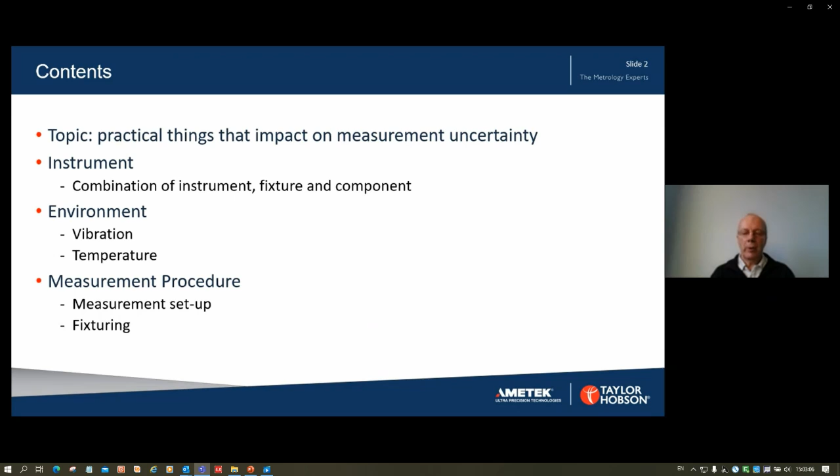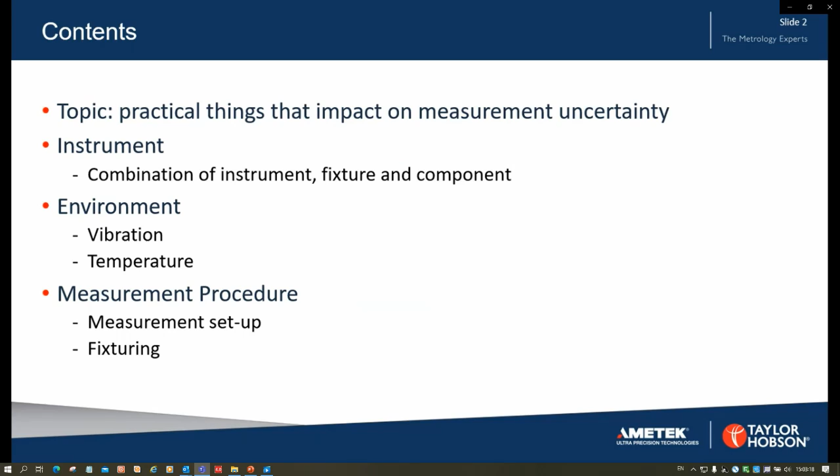I'll avoid instrument specifications as much as possible. Instead, we'll be looking at those practical things that affect the measurement but are not directly related to the instrument performance.

Before moving into the main body of the presentation, I thought it would be helpful to look at two preliminary slides to get us to a point of common understanding. The first slide will outline some of the influences that affect the measurement. The second slide will highlight the scale of the quantity values that we might be measuring with these instruments.

However, as I've implied, there are other influences on the measurement quality. These influences are the responsibility of the end user, or user for short. In the first instance, the end user is responsible for specifying the exact configuration of the instrument. Again, economy will play a part in the decisions made.

As an example, instruments are commonly available with different gauge resolutions. They might also be available with different anti-vibration solutions such as solid rubber mounts, pneumatic mounts, or even active anti-vibration mounts. These different configurations will each have their own characteristics.

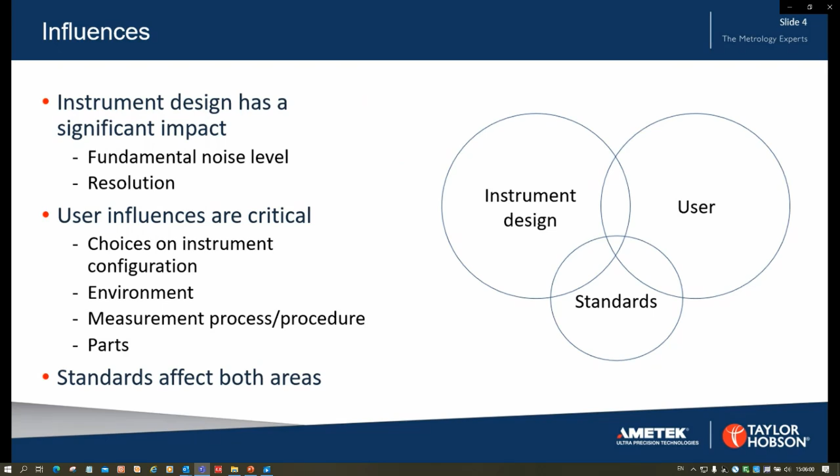The second preliminary topic is measurement scale. This is included to help us come to a common understanding of the units of measurement that we're using by relating them back to things that we might all have encountered in some way.

In the field of surface metrology, we deal with a significant range of dimensions, from less than a millimetre to 1,000 millimetres or more. However, most of the characteristics that we deal with are specified in the default unit of micrometers, or 1,000th of a millimetre.

We happily subdivide the micrometer. For example, we might talk about form deviations that are of the order of 1/10 of a micrometer.

With surface texture, we often talk about values that have a smaller scale than this. For example, it's not uncommon for surface roughness Ra values to be in the order of 0.01 micrometer.

We're all familiar with the 1 millimeter scale marks on a steel rule or tape measure. Going smaller than that, the thickness of a typical sheet of printer paper is about 100 micrometers.

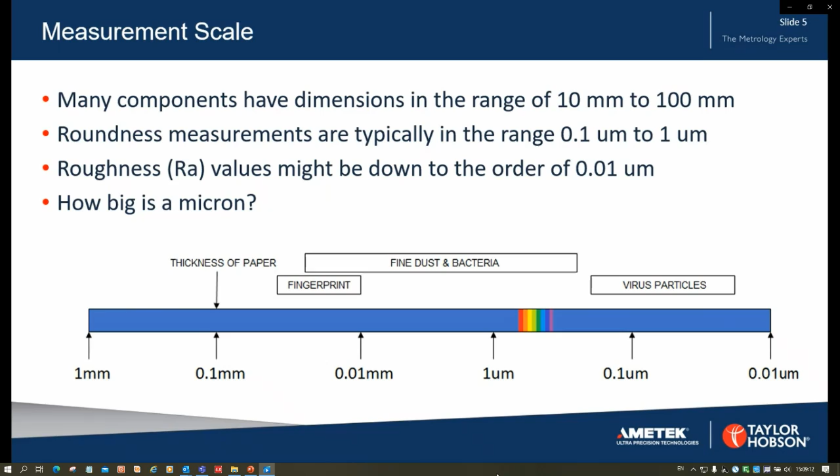In this next section, we'll look at some of the aspects of the instrument that contribute to the measurement uncertainty. For the purposes of this discussion, systematic errors such as axis straightness are not considered.

Each of the axes directly involved in the measurement will usually have some method of moving the axis, or some form of drive mechanism. The drive mechanism is likely to contain a motor and drivetrain, both of which can add noise into the measurement. The gauge will have a given resolution or resolutions, and of course the electronics might also be considered as a noise source.

Each of these systems contribute to the internal noise level of the instrument, which will typically be specified at particular measurement conditions, such as gauge resolution and axis speed.

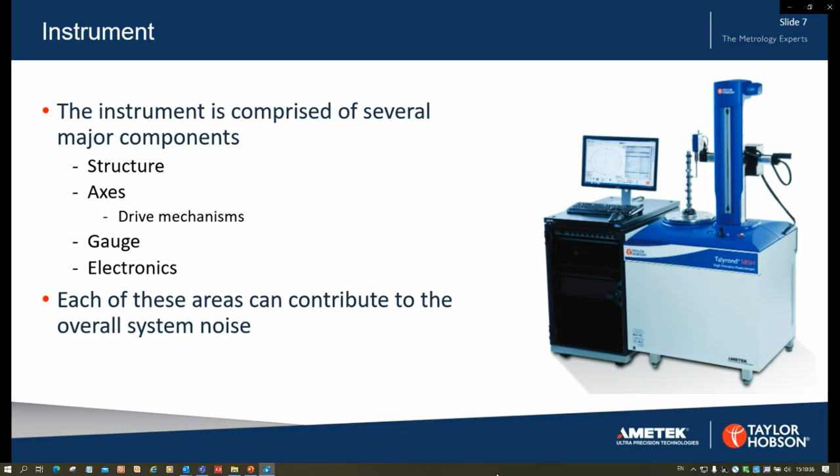At the same time, the stylus tip and stylus force might be dictated by standards. For example, in surface texture measurements, these two parameters are dictated by ISO 3274.

Design choices will affect the materials used in the stylus and its overall geometry. One good example is the interface between the stylus and the gauge. Regardless of the geometry of the measuring part of the stylus, this interface will have been decided by the instrument manufacturer to allow for interchangeable styli.

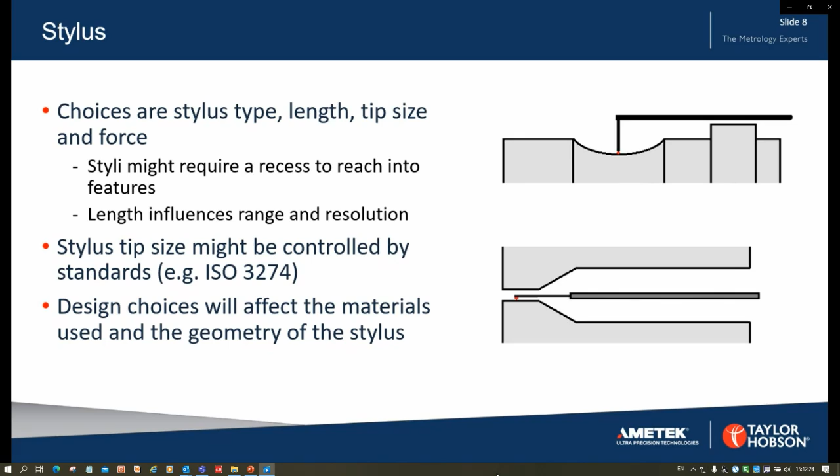Whilst the static force might be dictated by standards, the dynamic measurement force is a function of the traverse speed and surface acceleration, as well as the static force. Subject to the speed selections of the instrument, the choice of measurement speed is a user selection. The surface accelerations are dictated by a combination of the traverse speed and the form of the component. This again is a user influence.

We often talk about the concept of tracking, the ability of the stylus tip to follow the surface of the component. Another way of looking at this is to consider stylus flight. This is the same concept, but stated in a different way. Stylus flight is where the stylus tip leaves the surface of the component because the forces on the stylus are insufficient to keep the stylus in contact.

This might occur where the stylus tip has been forced rapidly up a feature on the surface, such as a machining mark.

Once the stylus is in flight, the main force on the stylus is the static stylus force, which will accelerate the tip towards the surface again. The time to reach the surface, and consequently the distance to the next measurable point on the surface, is governed by the trajectory of the tip. Moreover, the tip might well continue to rise off the surface for a brief time after leaving the surface.

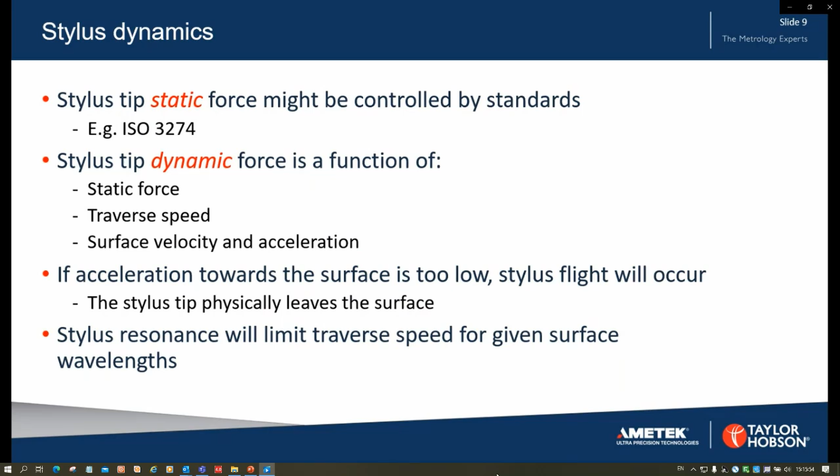The first wave after leaving the surface is likely to be highly irregular, as this is largely governed by the stylus trajectory at the time the tip leaves the surface. Stylus flight can be mitigated to a large extent by reducing measurement speed.

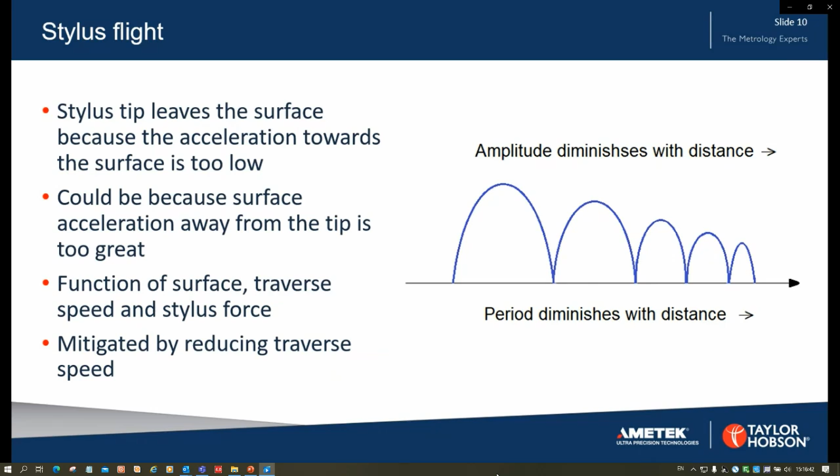As mentioned previously, stylus resonance is mainly excited by vibration. This is any vibration reaching the stylus or gauge. Stylus resonance manifests itself as an almost constant frequency, which is dependent principally on the stylus design. The amplitude will be dependent on the driving force or vibration level.

The wavelength due to stylus resonance is very short and is typically shorter than common LS filter values. The effect of resonance on the profile may therefore be reduced by the LS filter.

Resonance can also be caused by regular surface imperfections, which, when measured at a constant speed, equate to a frequency that is close to the natural frequency of the stylus, or a simple subharmonic. In this situation, it might be necessary to reduce the measurement speed.

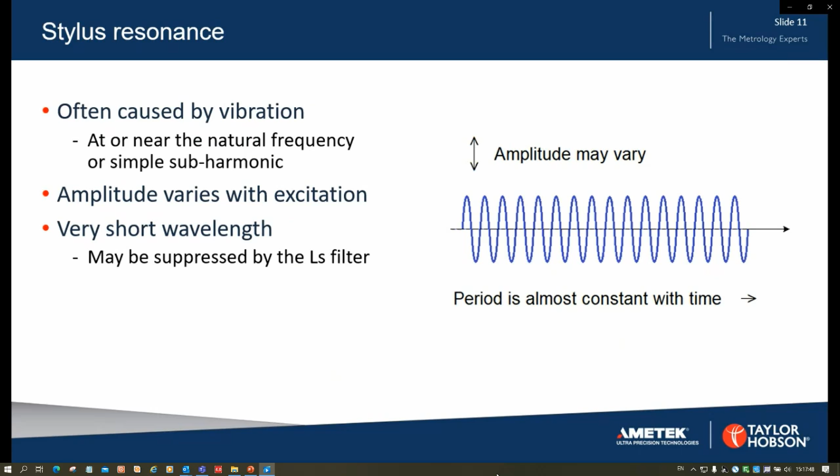The discussion on stylus resonance brings us to the next section in this presentation, which is environmental effects. There are two main environmental effects that affect the performance of the instrument: temperature and vibration.

Temperature changes during a measurement can cause drift, primarily due to differential expansion. Many of the measurements that we might take might be completed quickly. In such circumstances, the effects of temperature changes within the measurement room might have little effect because of the short timescale. However, some of the measurements that we take might involve a much longer timescale.

For example, when measuring on a roundness instrument, it is quite common to take several measurements to establish an axis and then take further measurements using this axis as a datum. Temperature changes during this process can cause drift, affecting the axis definition that we have taken. Where this is an issue, the magnitude of the drift would have to be quantified and taken into account into the uncertainty budget.

Instrument siting is important. For example, if the instrument is close to a window, direct heating from sunlight might cause significant differential heating of the instrument, which in turn will affect the measurements. The same is true for radiators and other heat sources.

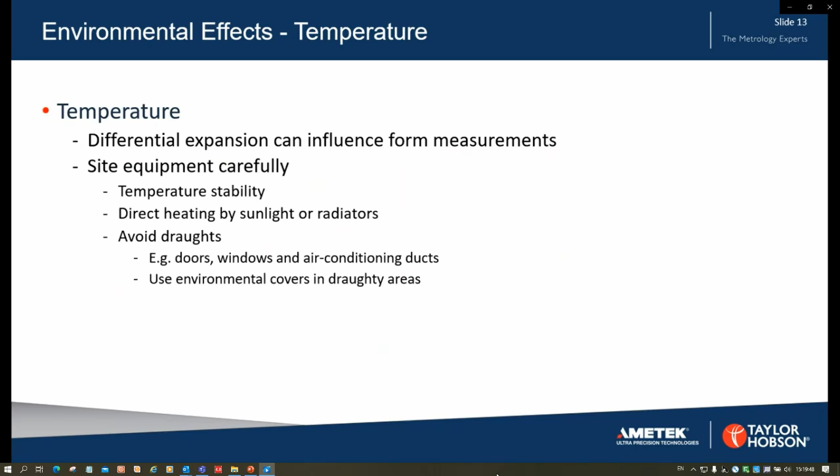The second major issue is vibration. The two sources of vibration are airborne and floorborne. With airborne vibration, the effects are likely to influence different parts of the instrument, whereas with floorborne vibration, the effects are likely to impact the whole instrument structure.

We've already mentioned drafts. Aside from differential cooling or heating, drafts can give rise to a source of airborne vibration. Drafts can easily affect the stylus and can also cause vibration in panels and other parts of the instrument. The use of an environmental cabinet can help reduce some of these effects.

Another source of airborne vibration is sound, especially sharp or percussive sounds, such as might result from something being dropped or a door slamming nearby. Talking close to the instrument can also cause vibrations in the stylus, as the resonant frequency of the stylus is likely to be within the frequency range of a human voice.

Perhaps the most significant source of vibration to be considered is floorborne vibration. Any vibration in the floor on which the instrument is mounted will be transmitted into the structure of the instrument. This will result in differential vibration within the system, which will in turn affect the measurements.

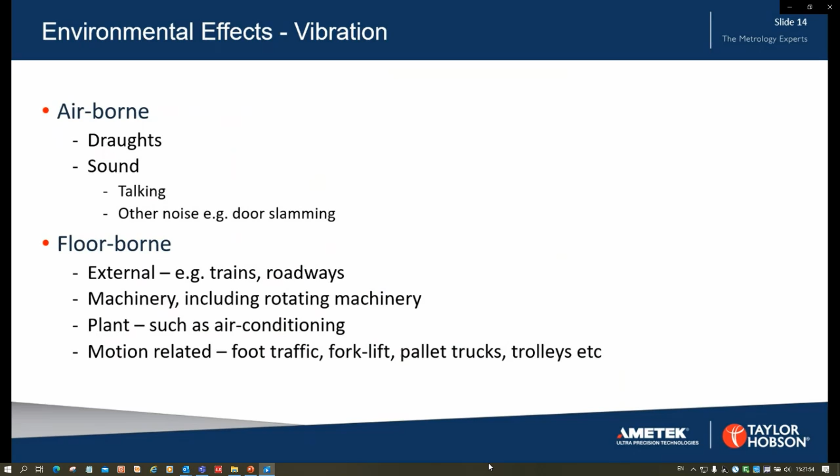The impact of floorborne vibration is strongly linked to magnification. If you have ever used a camera with different focal length lenses or a zoom lens, you will know that camera shake becomes more significant as the focal length and therefore the magnification increases. To mitigate the camera shake, improved support such as a tripod might be required, and the exposure time could be decreased.

Not surprisingly, recommendations for laboratory floor vibration limits are linked to magnification. Originally, the recommendations might well have been linked to the use of standard laboratory instruments, such as an optical microscope. For any given vibration level, as the magnification is increased, the vibration will cause increased blurring of the image. To work at the highest magnifications, which for an optical microscope is about 1000 times, vibration must be very low.

In surface metrology instruments, it's not uncommon to see magnifications of approximately 0.01 micrometer per 10 millimeter division. This equates to a magnification of 1 million times, hence the maximum allowable vibration level has to be much lower than when using an optical microscope.

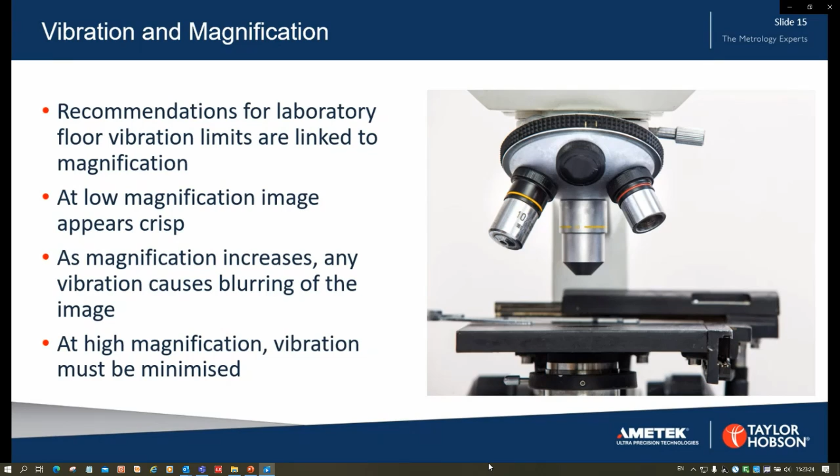At the levels involved in surface metrology, the measurement process is key to obtaining good results. No matter how good the instrument and its environment, a poor measurement process can lead to inconsistent results and therefore to a large measurement uncertainty. Control of the measurement process is almost always in the user domain. In this next section, we shall look at some of the issues that need to be taken into account.

One of the first things to consider is the measurement loop. The diagram here shows the same component being measured at two different heights within the measuring volume of the instrument. This could be a very real situation when measuring different features on a long component. For each case, the measurement loop through the base of the instrument, the column, the traverse unit, the stylus, the component and fixture, back to the base, is shown by the blue rectangles.

Let us assume that floorborne vibration is introduced into the base. If we consider that some small vibration is set up in the column, then the base will act as a node, and the vibration might affect the column as shown by the dashed red lines. Clearly, the amplitude of the vibration will be greatest nearer the top of the column. This means that vibration will affect measurements taken nearer the top of the column to a greater extent than near the bottom.

Wherever possible, the measurement should be taken nearer the bottom of the column. Logically, this impacts on the design choices being made for any work-holding fixtures. Ideally, wherever possible, these should minimize the height by which the component is raised. The number of interfaces should also be minimized, as these will not be infinitely stiff and may magnify vibrations or lead to other instabilities, such as component rocking.

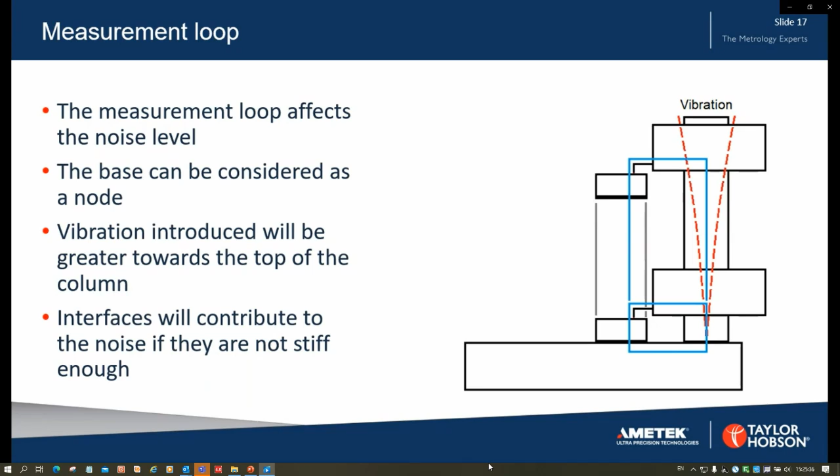It almost goes without saying that for best repeatability between measurements, the same portion of the gauge range should be used. Ideally, this should be within the calibrated portion of the gauge range where possible. Many instruments provide an automatic stop-on-contact feature that allows the gauge to be brought into contact with the surface either at the midpoint position or at some other user-defined position within the gauge range. Such a feature can be used to help ensure that the same portion of the gauge range is being used.

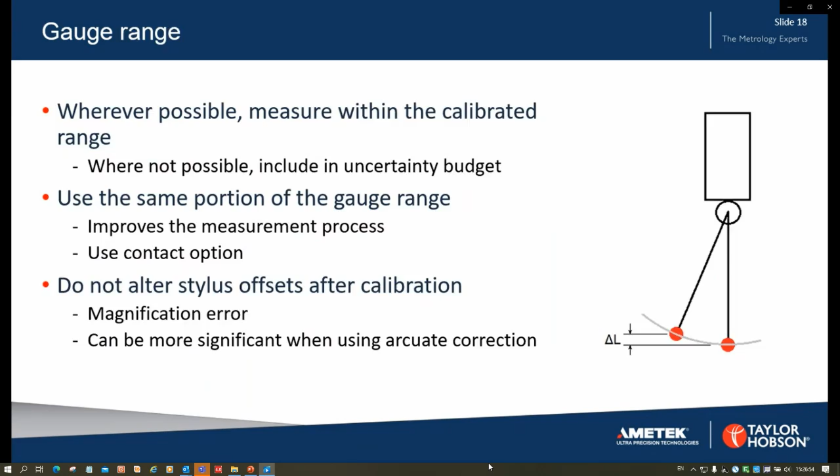There are some other points that should be considered in relation to the gauge. Above all, the key is to avoid handling the gauge as far as possible. Where gauge force or stylus orientation is achieved by manual means, these adjustments should be kept to a minimum to avoid heating the gauge, which is likely to be sensitive to temperature in some way. The gauge, by its very nature, is an extremely sensitive piece of equipment, and ideally the gauge should be allowed to settle after any adjustment of stylus angle or gauge force.

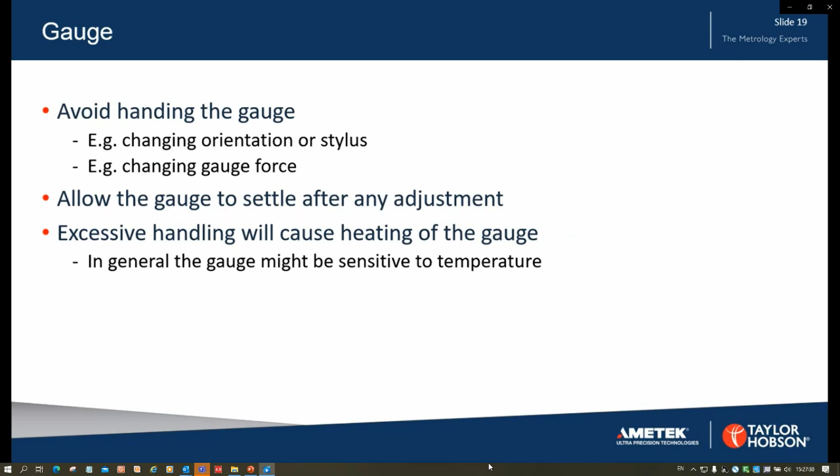We've spoken a lot about thermal effects influencing the instrument. However, the same is true of the part being tested. For accurate form measurements, for example, the component should be allowed to stabilize to the temperature of the measurement room and the measurement equipment. Again, handling can cause heating of the component and can also lead to contamination by grease and fingerprints.

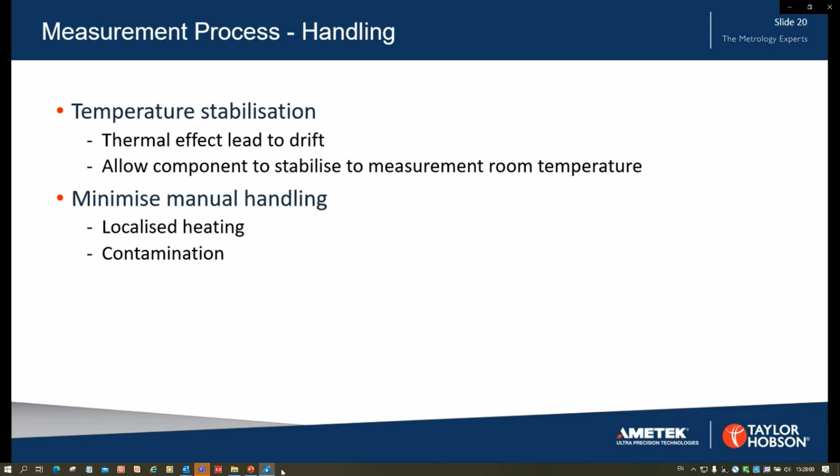Contamination is an obvious impediment to obtaining good measurements. Dust particles often show up as spikes in measurements. These particles can be dragged along the surface by the stylus, leading to erratic measurements, or might even stick to the stylus tip. Some of the common stylus tip materials are insulators and can easily become statically charged, attracting and holding particles that will cause problems later.

Grease films are another problem. The films can be unpredictable. Repeated measurements might show a form error that appears to be reducing with successive measurements as the stylus cuts through the film. Unfortunately, the grease will often transfer to the stylus tip, causing erratic results or helping to retain particulates on the surface of the stylus.

The stylus tip should always be inspected and cleaned as necessary prior to a high precision measurement being taken. Use of a suitable magnifying glass or pocket microscope would help with inspection. With care, the stylus tip can be cleaned using a jeweler's cleaning compound or a similar process.

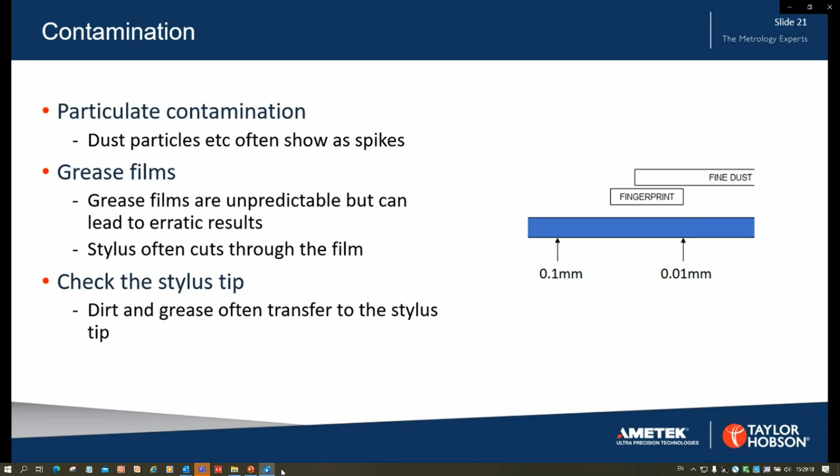Good fixturing is essential for high accuracy measurements and for improving the repeatability of measurements between samples. In the case of large components, gravity might be sufficient to hold the component in place. Use of a kinematic mounting procedure, as simple as placing the component on 3 slips of paper, might be all that is needed to provide a stable measurement.

In other situations, particularly with smaller components, the components might need to be restrained using a collet chuck, vise, or other fixture. Wherever mechanical means are used to constrain a component, care should be taken to limit the forces applied to the component so as to minimize distortion effects due to compression.

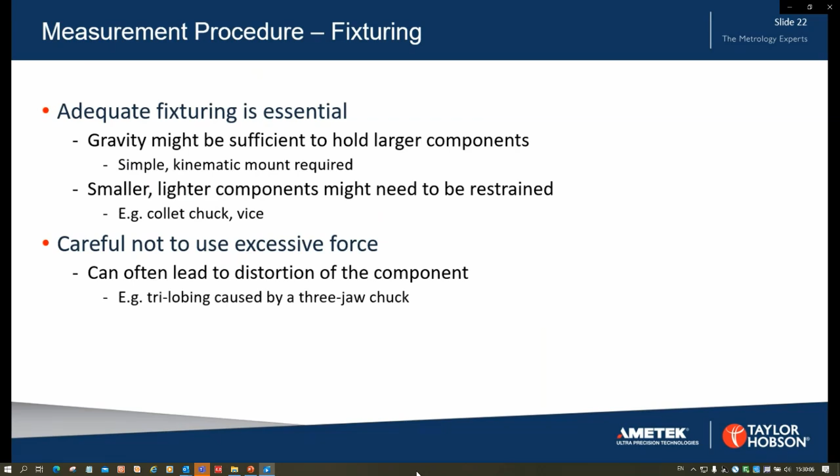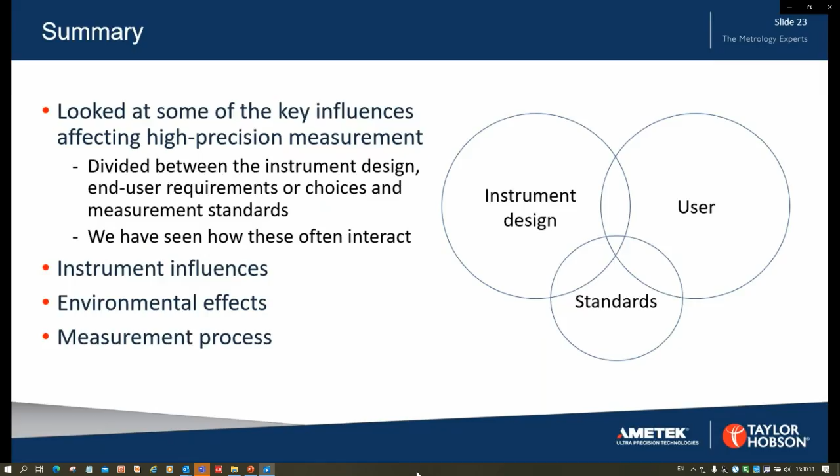In this presentation, we've looked at some of the key influences affecting high-precision surface metrology. We've seen how these influences are divided between the measuring instrument design, the end-user requirements and choices, and measurement standards. In particular, we've looked at some issues relating to the instrument and its use, environmental effects, and the effect of the measurement process.